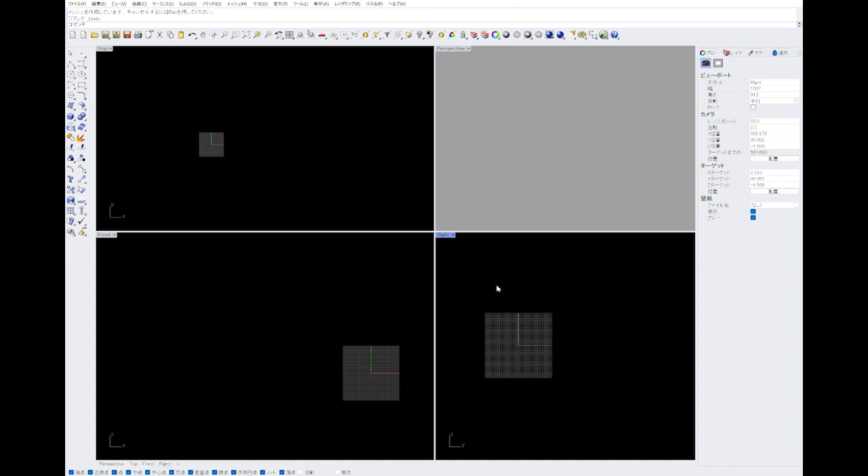First of all, I will use the straight line tool to create an outline. It seems that no one else uses this kind of method, so I think it's a slightly new method.

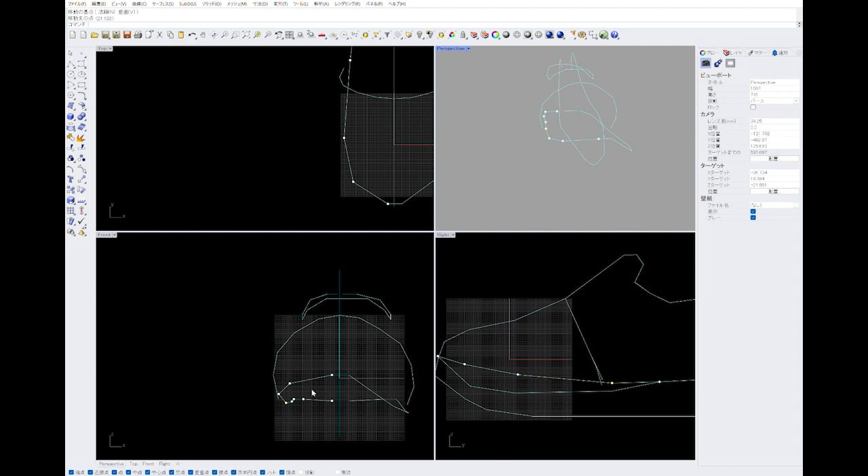If you do this first, you won't have to tweak the overall silhouette later, so the rest of the work will be easier.

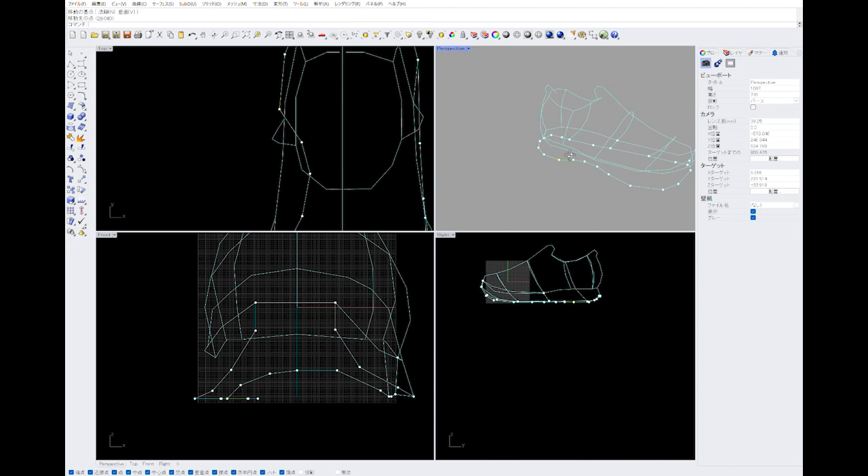The reason for using the straight line tool is that you can adjust the shape greatly by adjusting just a few points.

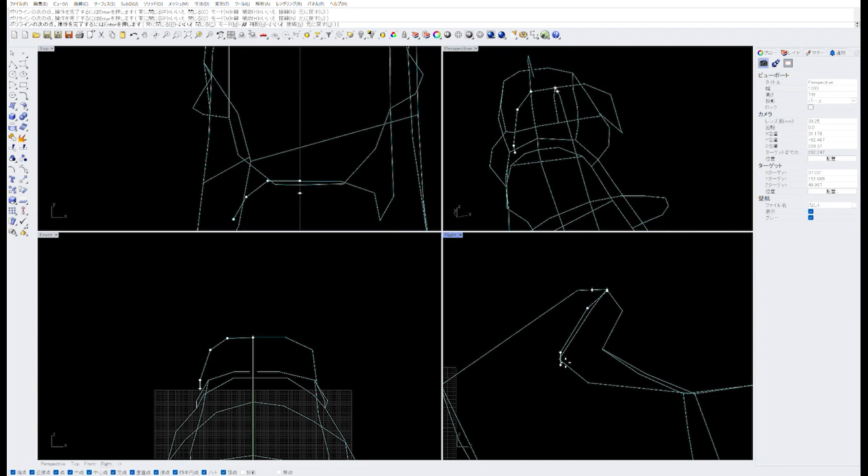So I think it is necessary to minimize the number of points as much as possible.

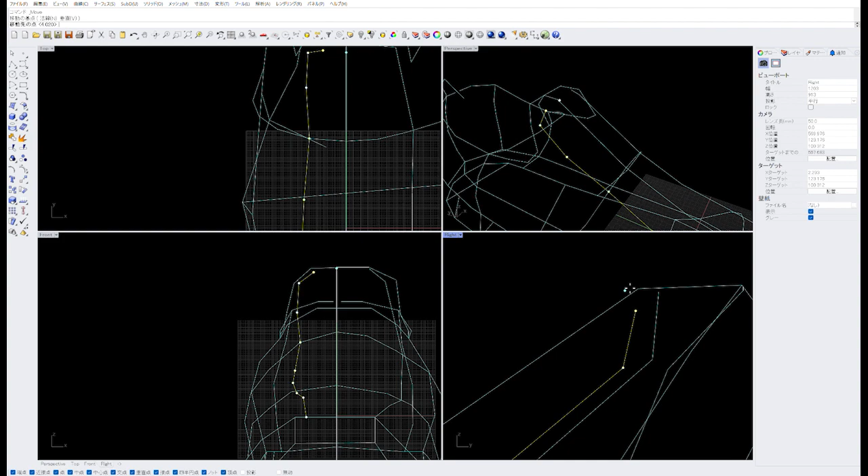Another point is that where the vertical and horizontal lines intersect can be adjusted at the same time as the points are piled up, so I think it's easy.

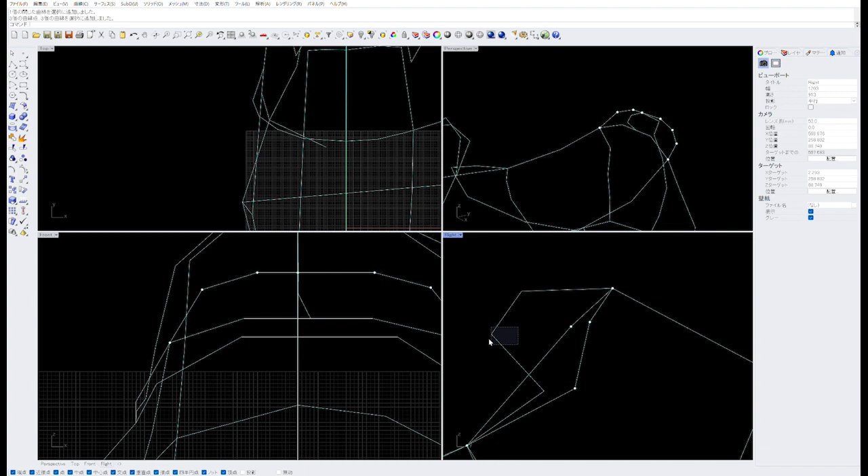When doing this work, it will not look three-dimensional from the same angle, so I think it's good to check the shape while moving it.

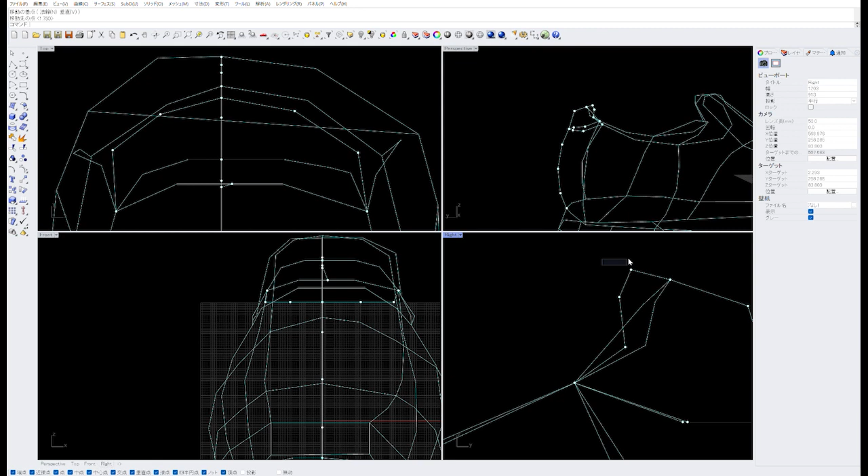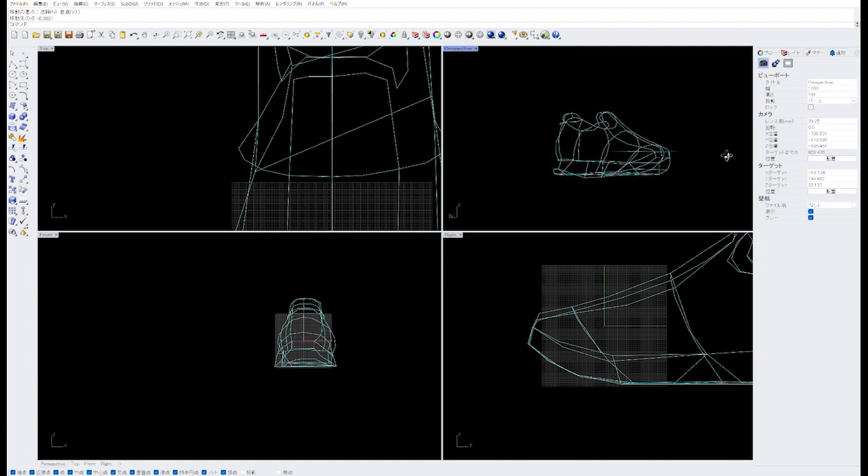When I'm very busy, I don't have time to do rough sketches. So I thought that if I could sketch directly in the 3D Space app, I could reduce my work, and came up with this method.

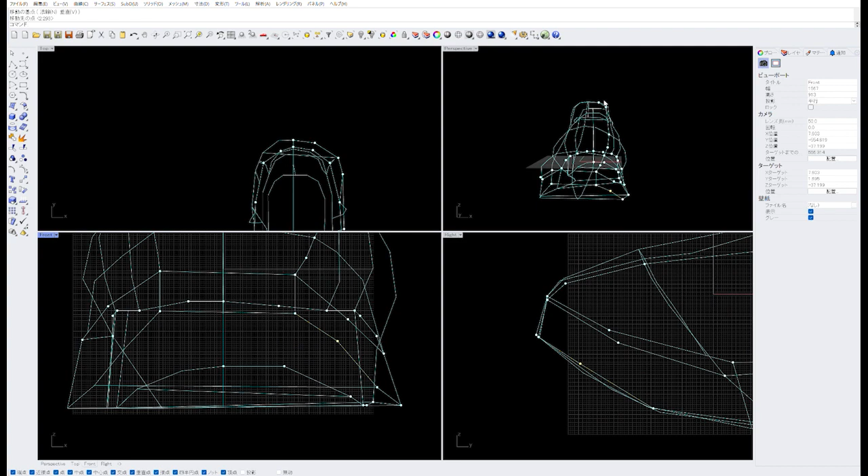Now draw a smooth outline according to the guideline with the curve tool.

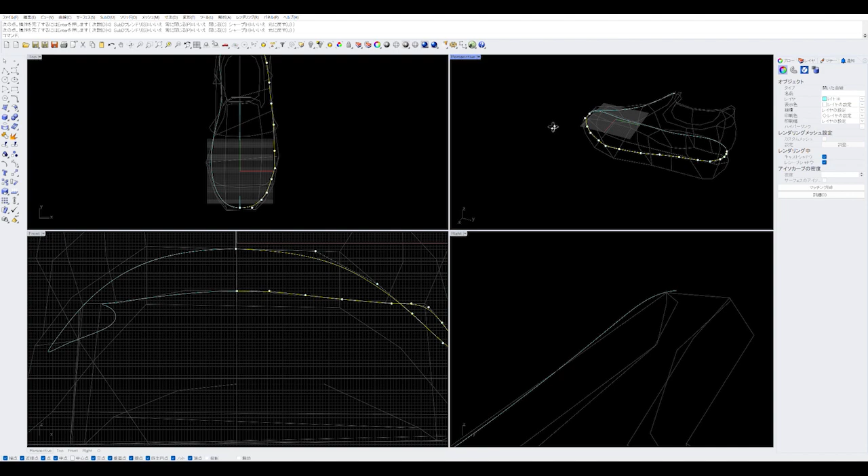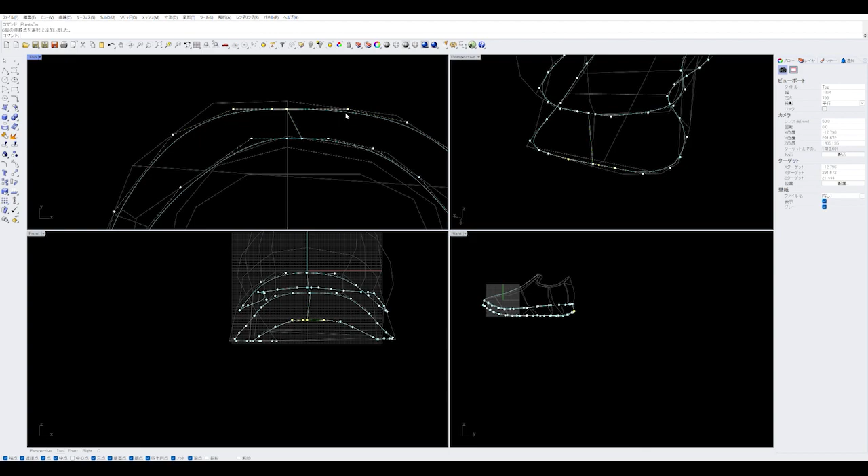I thought it might be difficult to make organic industrial products like shoes with Rhinoceros, but I found I can do that easily this time.

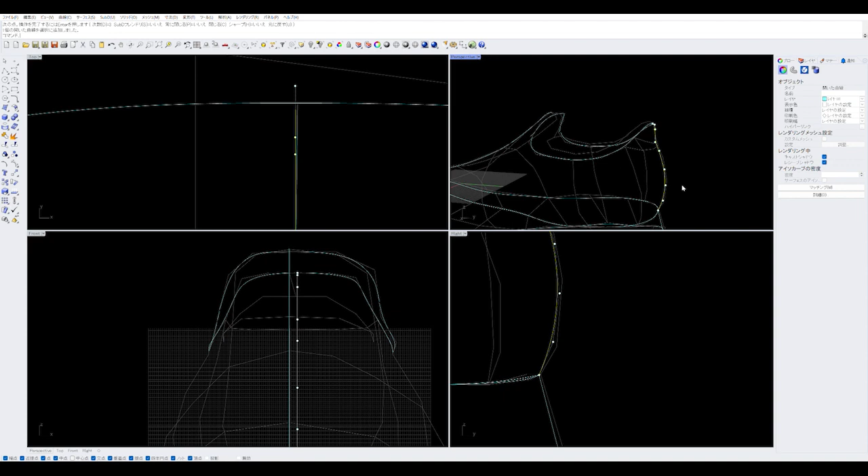When drawing a curve, the surfaces will be attached along these curves. So I think you should try to make it look smooth so that the flow of the curves does not zigzag.

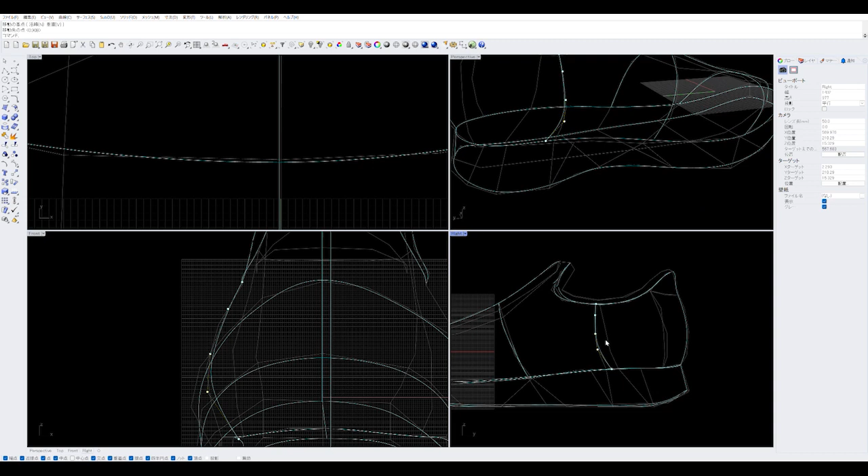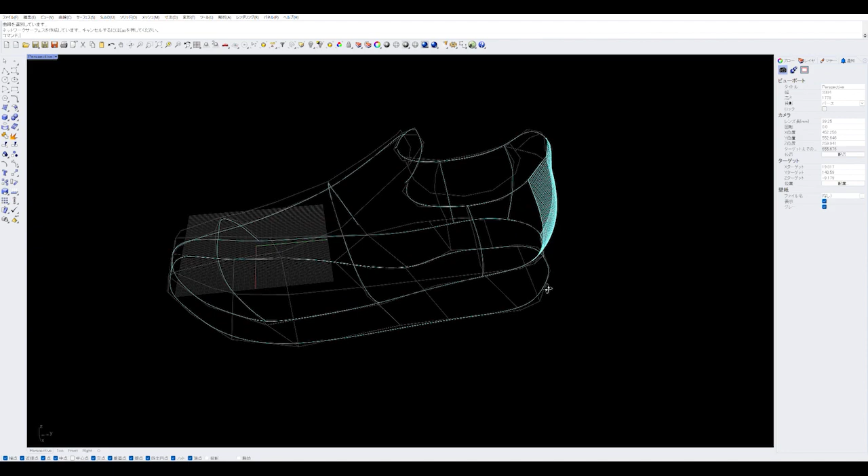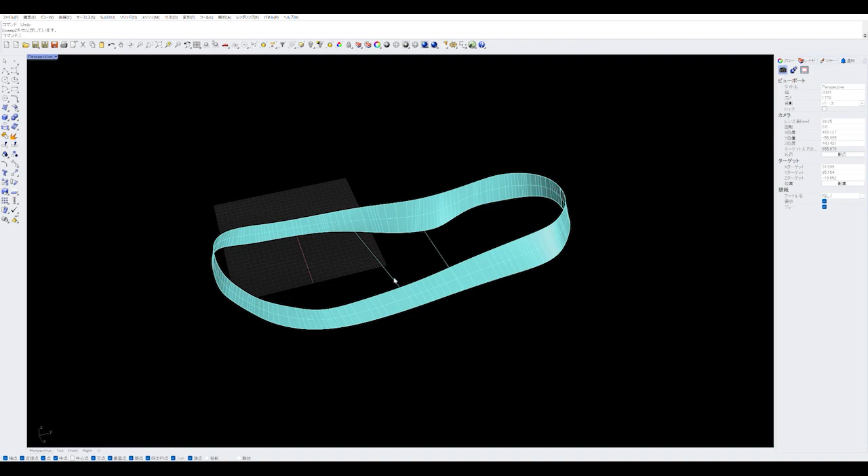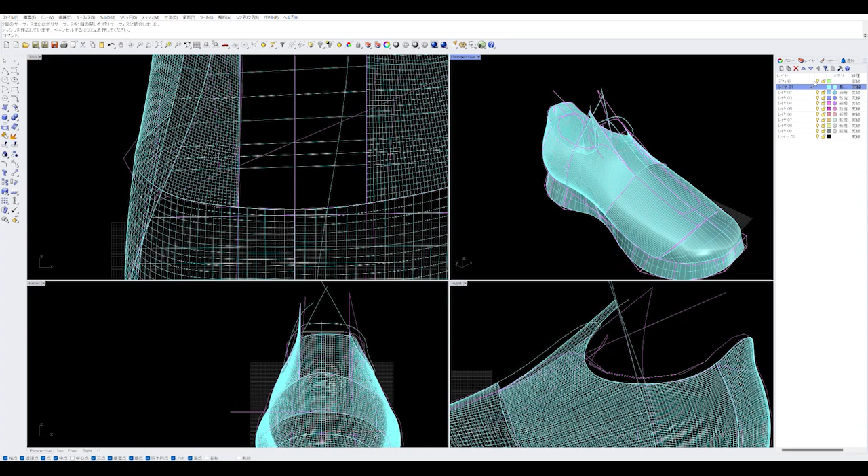When making a surface with a winding outline edge, it is best to first create a wide surface that includes the outline. You can make a beautiful surface by cutting the wider surface with the winding outline later.

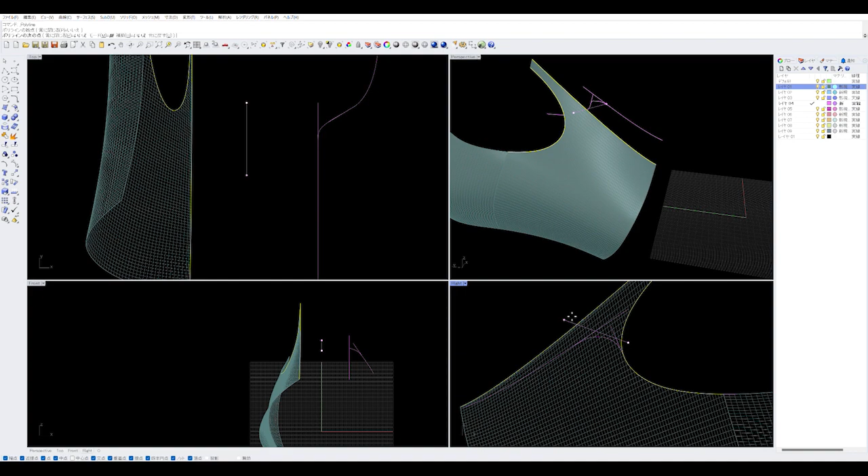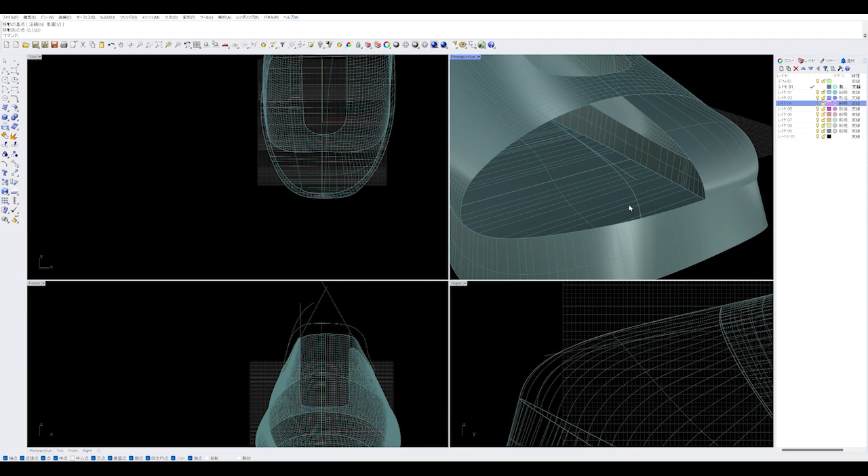If you can't make the surface as you intended, I think it's a good idea to add a curved line in between to serve as a guide and then make the surface.

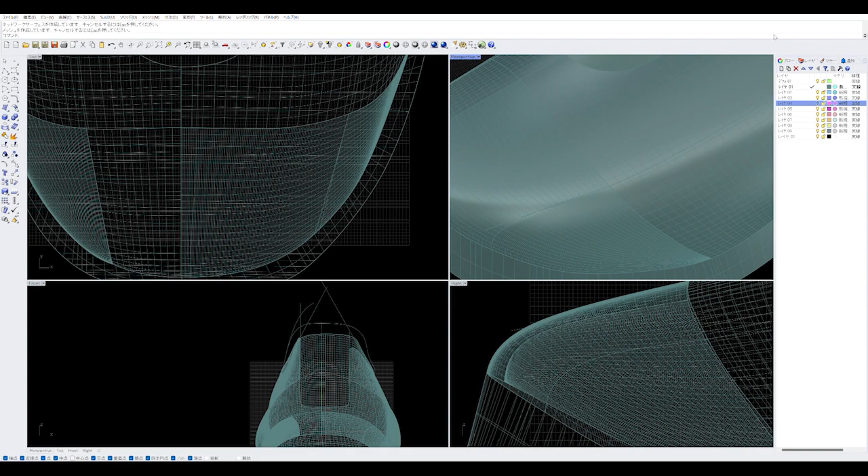I think it will look attractive if there is a soft surface on the edge of the entrance of shoes, where you put your foot.

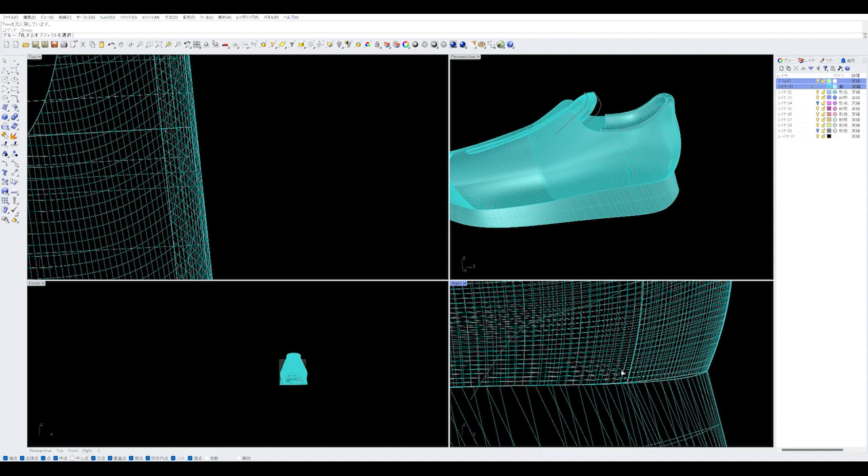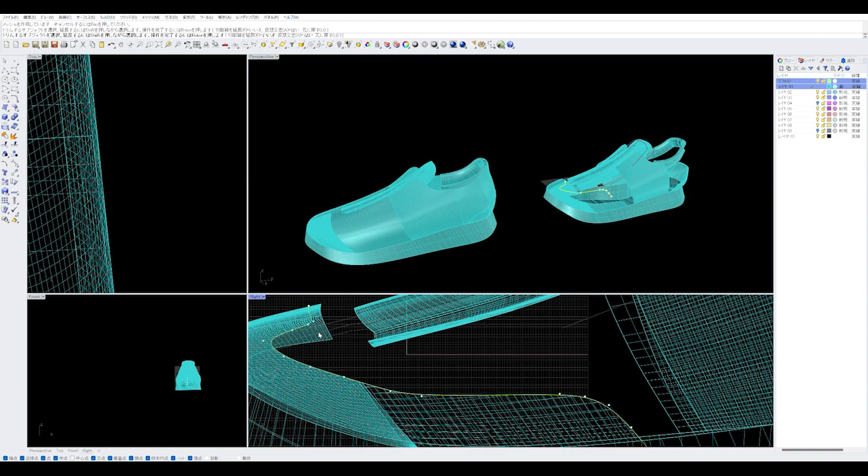When cutting out the shoe parts, it is a good idea to copy and proceed in two states — the object to be cut out and the base object to be pasted.

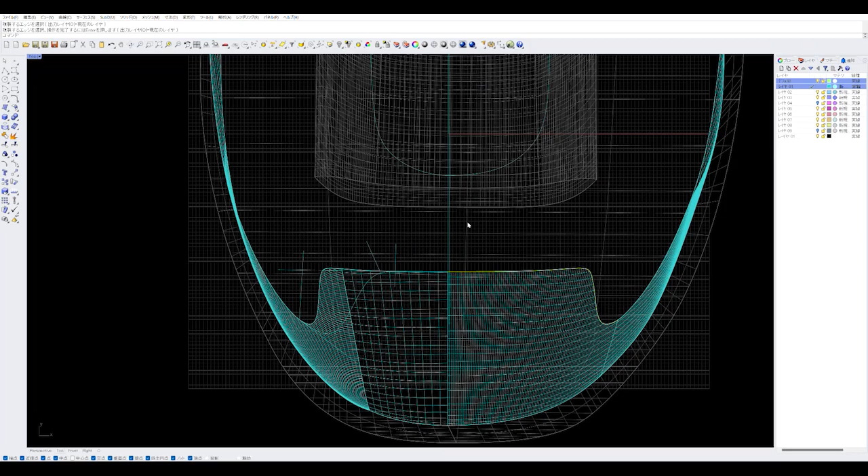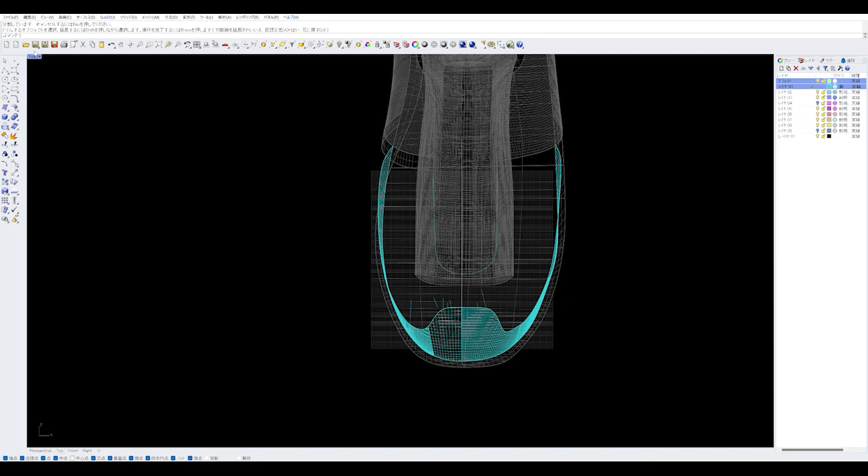Since the parts have a thickness, I use the straight offset tool to express that state.

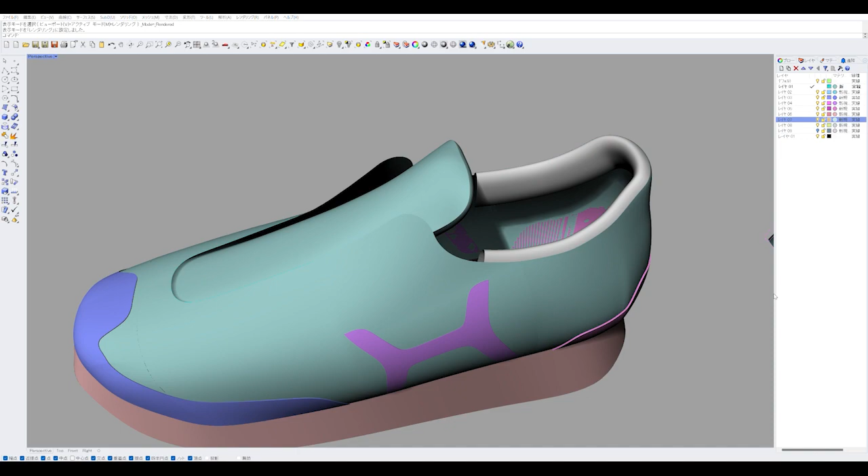First, cut out from the side, then draw a line again so that the width is the same when viewed from the top.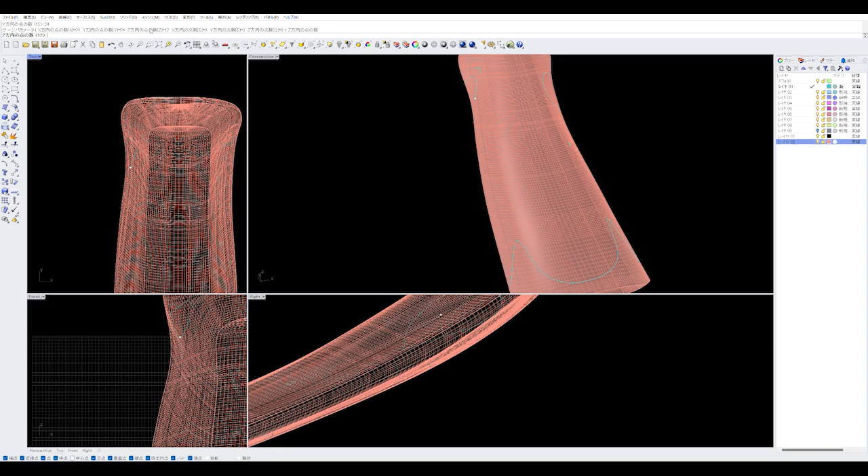If objects collide with each other and appear to be embedded, use the Cage Edit tool to make adjustments so that the colliding parts are dented so that it is not strange.

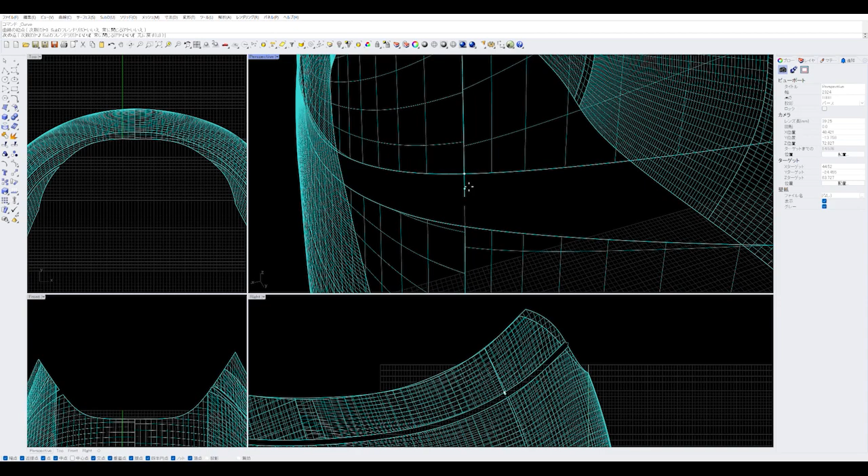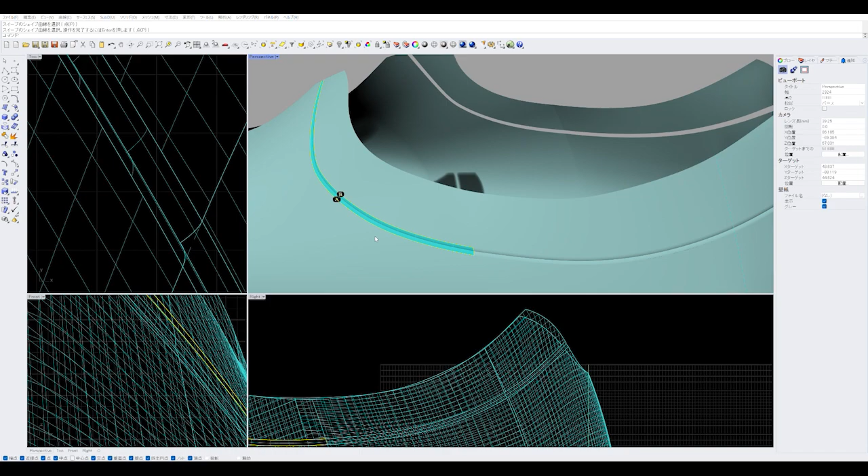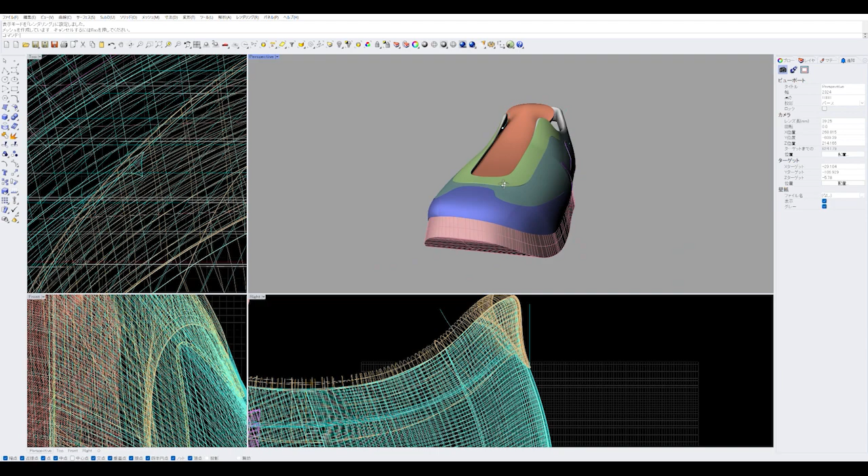This seam is what makes it look like a sneaker, so I was particular about modeling it, but it completely disappeared in the rendering. That's really unfortunate.

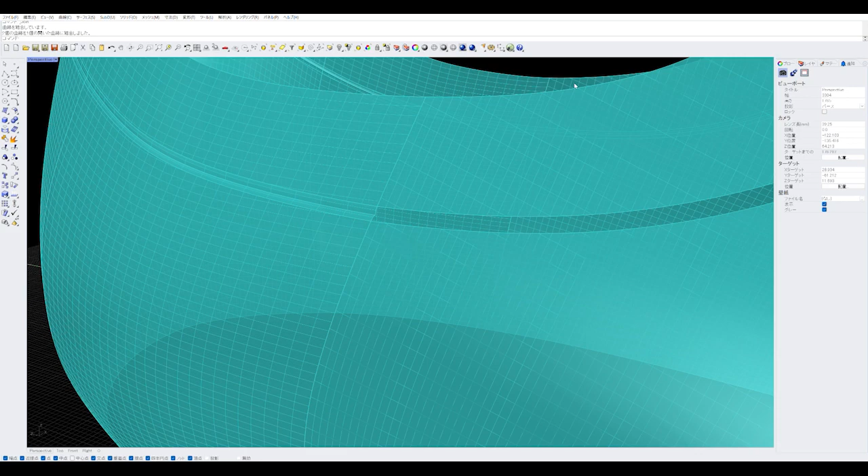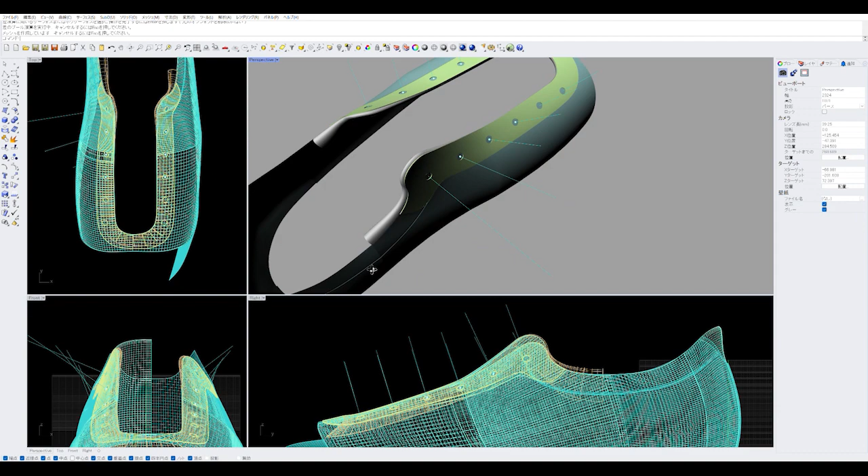Rhinoceros has a command to easily draw a line in the normal direction, so it was easier than I thought to make holes to pass the shoelaces through. This is one of the reasons I love Rhinoceros.

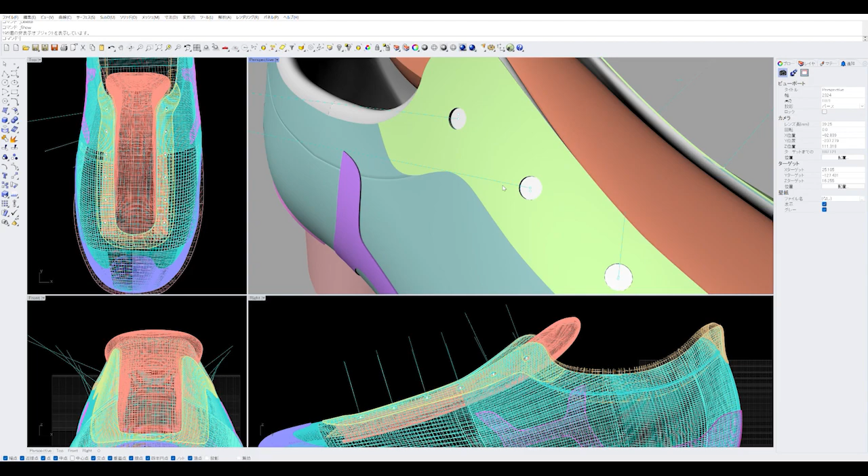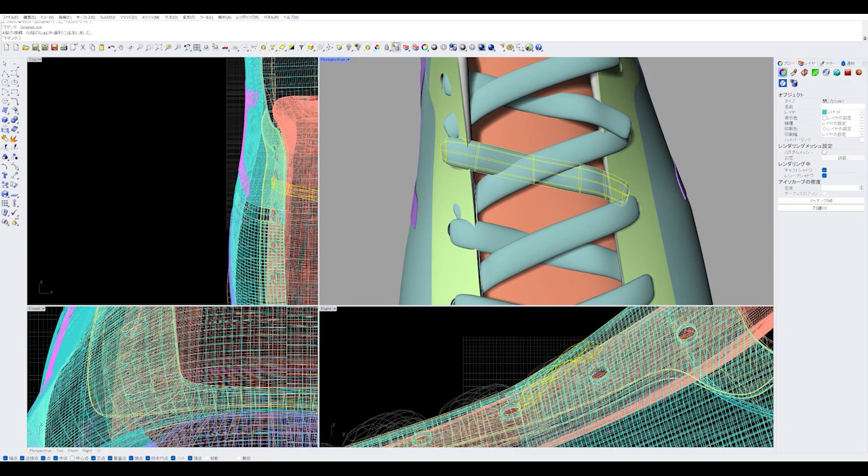I used sub-D to model the shoelaces. It was a modeling style that is very suitable for creating organic objects like this. Another wonderful thing about Rhinoceros is that it can be modeled in various ways.

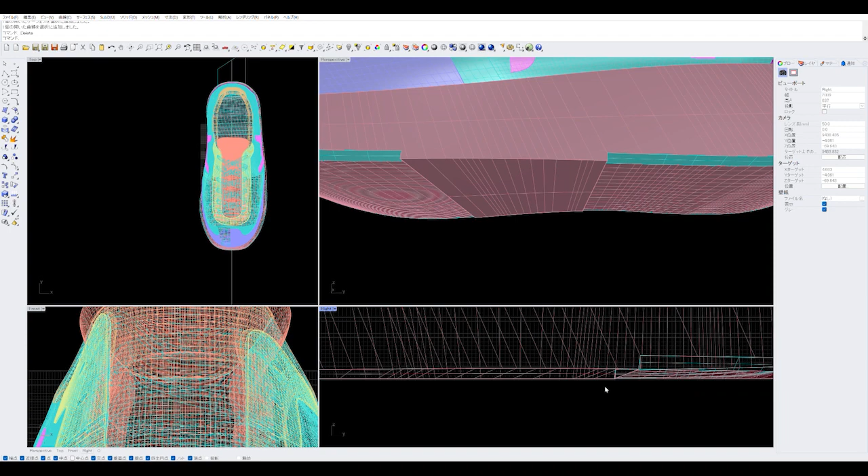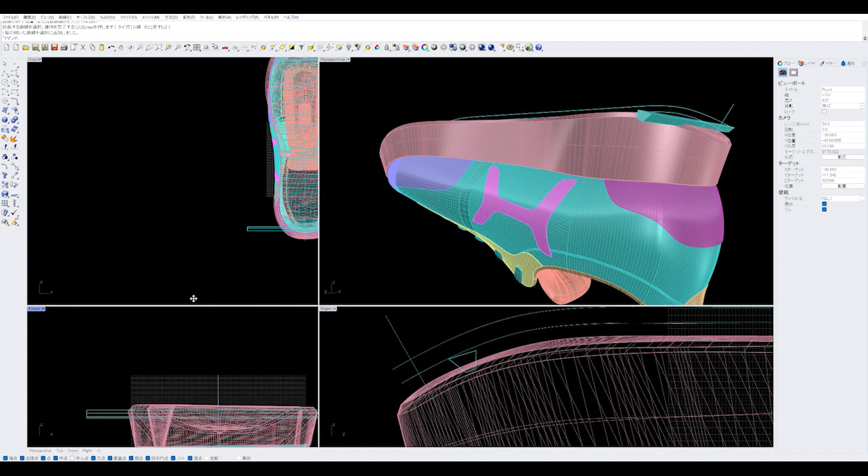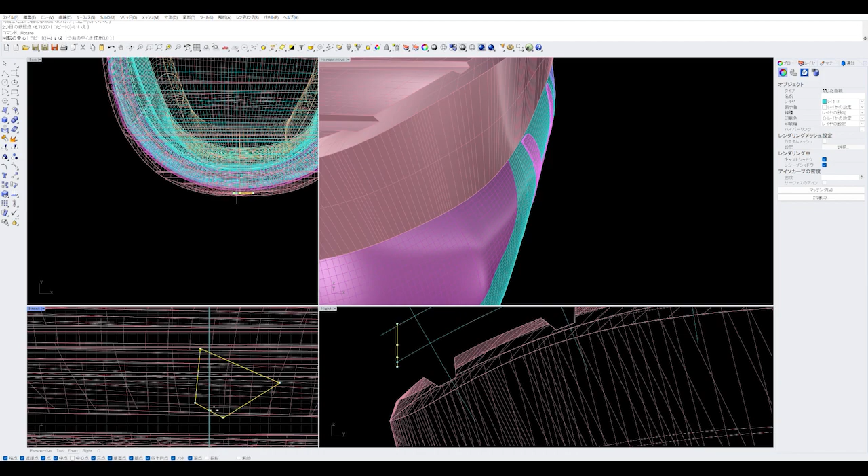The graphics of the grooves on the bottom of the sneaker is a good place to really show off your design, but I got tired of it, so I chose a simple lattice pattern. I used the curve command where the surfaces intersect to create the groove line.

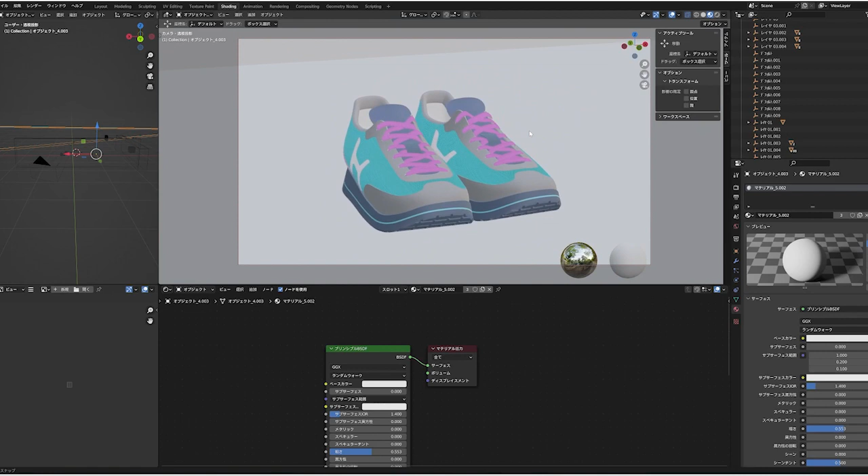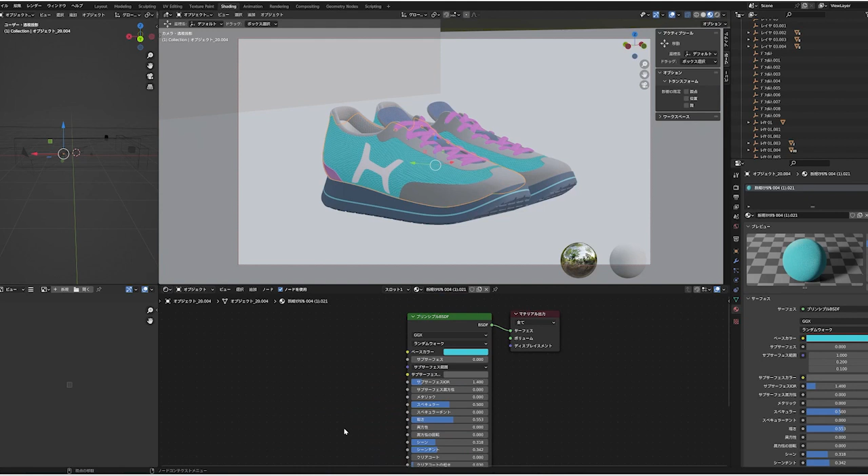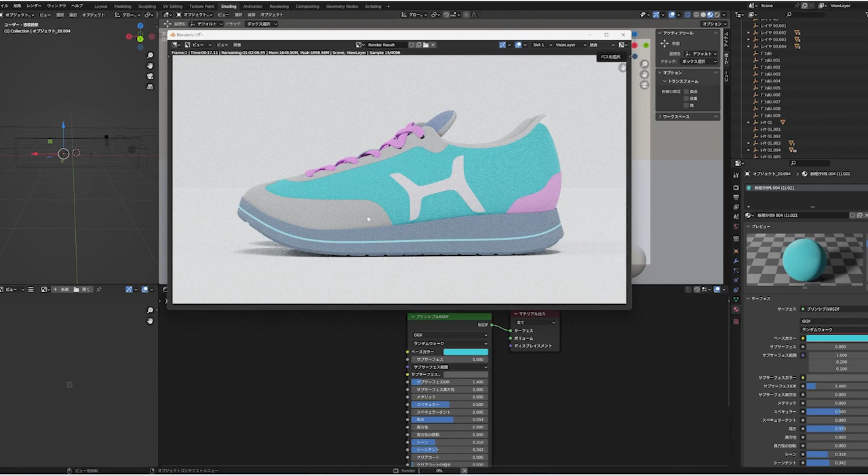I tried using UV mapping to get the texture of the sneaker material, but this didn't work well with the Rhinoceros polygon mesh. For that reason, I chose the Magic Texture node and was relieved to find that the weave came out well. Please be careful that UV mapping does not work on the quad mesh.

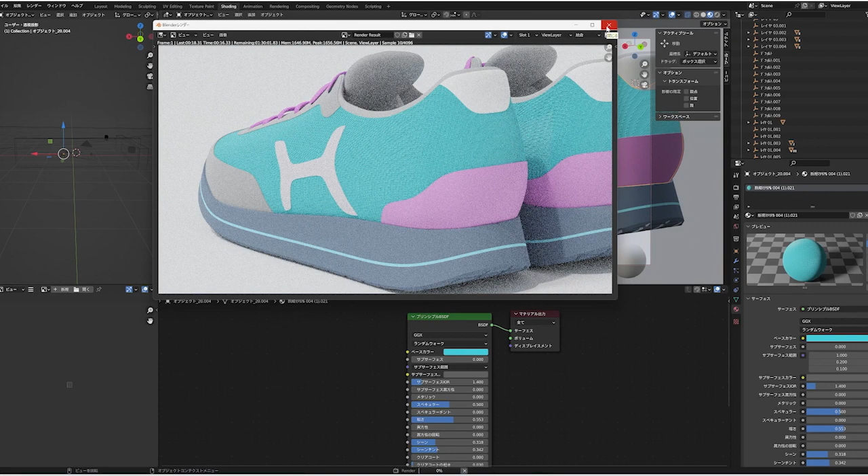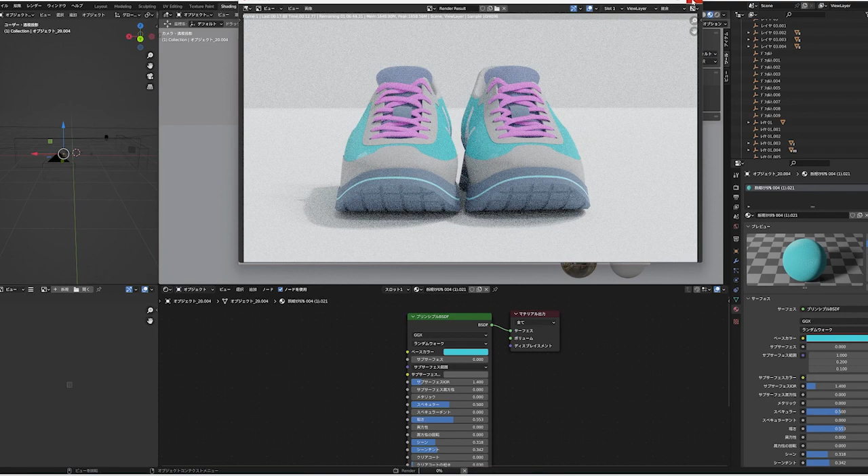Until now, it was all monotone, so this time I tried colorful coloring. It's fun to render because it looks very realistic when it has a texture.